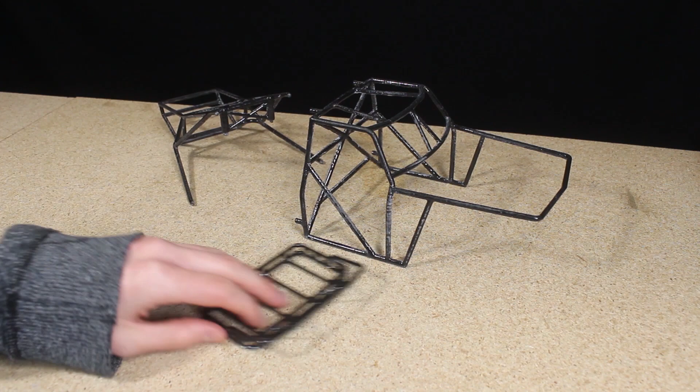I started off by doing some sanding on the cage and roof rack pieces in preparation for painting. I usually like to sand the entire surface of a part prior to painting when using a resin coating like I did here. I will still use the file in a few spots where the resin was a bit thick, like in some of the corners.

I got several questions on the last video regarding why I chose to use a resin coating as opposed to using acetone to smooth the surface of these parts. I chose a resin coating because I wanted to print these parts in PLA rather than a material such as ABS, which can easily be smoothed with acetone vapor. I don't do a whole lot of printing in ABS, so none of my printers are really set up for it, and when I do print something in ABS, it's usually just a relatively small, simple part.

But for a large print like these cage pieces, which require a lot of time and material to produce, I prefer to use PLA since it's much easier for me to print, and it's far less likely I'll encounter any warping or other issues while printing.

Also, as a positive side effect of using a resin coating, it helps strengthen and stiffen the cage. But if I had the means of reliably printing these cage pieces in ABS plastic, I would definitely consider doing so and choosing a method such as acetone vapor smoothing to achieve a nice surface finish, since that would cut down the amount of time spent sanding. I will be showing some other processes for smoothing 3D printed parts, including using acetone, in future videos.

Right after sanding, I sprayed a few light coats of primer. I ended up running out of the primer I was using for the cab piece, so I used a different brand for the rear section. That's why they're two different colors.

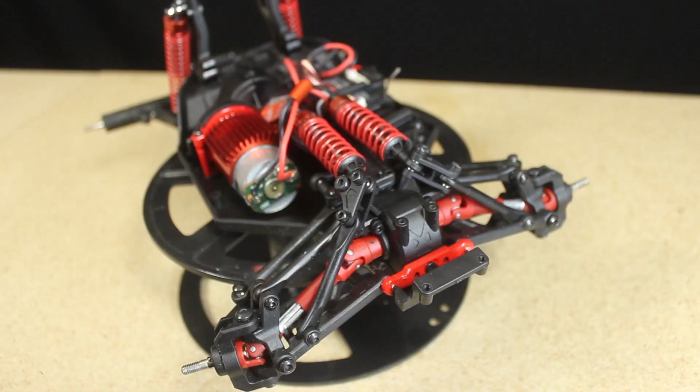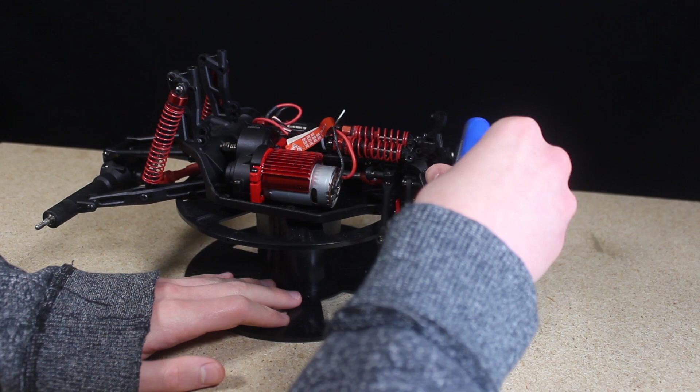I've been brainstorming some ideas about where I want to place the battery. I decided to mount it on the very front. To secure it, I designed and printed a custom battery mount.

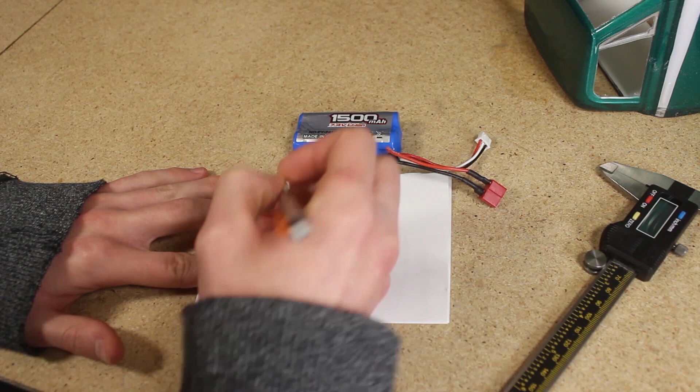For a while now, I've received a lot of comments from people who want me to show more of the design process for creating parts, and from those who want to learn how to design and print their own custom parts for their RC vehicles. I thought this battery mount would be a great part to demonstrate the design process I used to create it, and to demonstrate just how easy it is to create simple custom parts for your vehicle with just basic CAD knowledge. This is by no means meant to be a step-by-step follow-along tutorial, just a general overview of how I went about designing this part.

Hopefully this will help those of you who want to create your own custom parts get some ideas and inspiration. I started by measuring the dimensions of the battery pack so I would know how big I needed to make the mount.

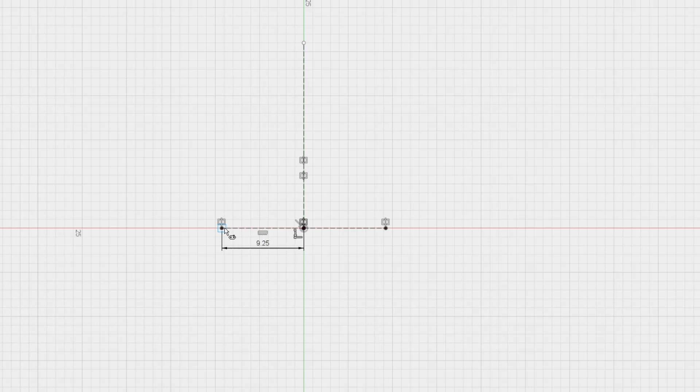With those dimensions, I began making a simple sketch using CAD software. To design this part, I decided to use Autodesk Fusion 360, but a simple part like this could be easily made using just about any 3D modeling software.

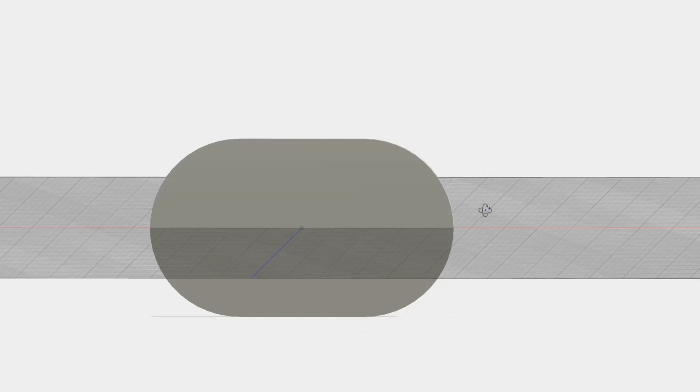When designing this part, I made sure there would be plenty of room for the battery, so I oversized the interior cavity by 2 or 3 millimeters to ensure the battery wouldn't fit too tight. I wanted to lean on the side of having the battery holder be a bit larger than needed. If the battery ends up being a loose fit and I need to use foam padding on the inside, it's not a big deal. But if I lean towards making this holder as tight and snug as possible, I risk making it too small and having to reprint the part.

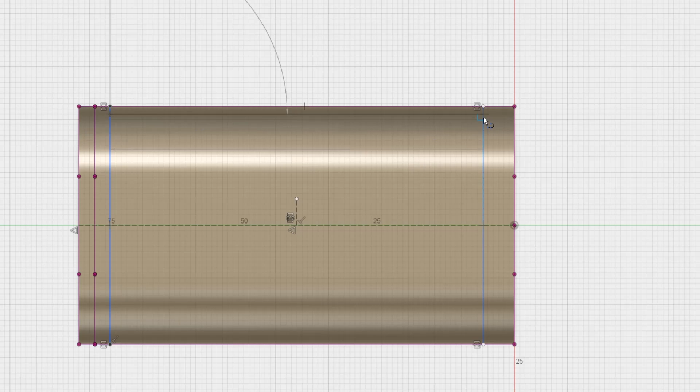I can be a lot more relaxed about dimensions and tolerances when I'm making sure there's plenty of room. While modeling the part, I thought it would be cool to make the front of the mount look a bit like a radiator, so I incorporated that into the design.

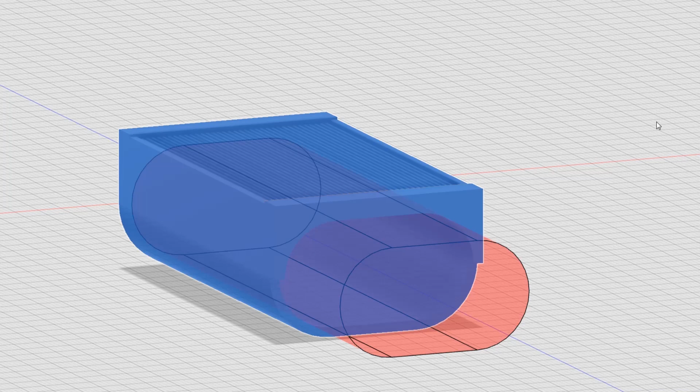One thing I think is very important when doing any design work, especially as a beginner, is to always start with a basic sketch before modeling, whether with pencil and paper or sketching software. I like to get my ideas out on paper and come up with a plan of how I want the part to look and what functionality it needs before modeling in CAD.

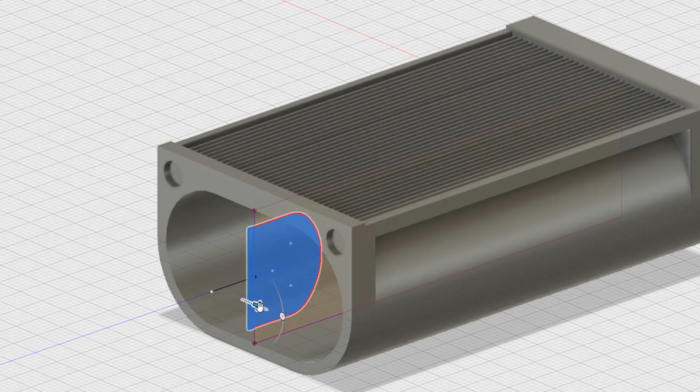I'll often be able to identify potential issues or areas for improvement just from a rough sketch. But since this part is very simple and I had a pretty clear idea of how I wanted it to look, I didn't end up sketching anything out, I just dove straight into the design.

I'm very pleased with how this part turned out. The only thing I forgot to do was add 1 or 2 additional magnets to the opposite side of the cover, but as you'll see, I end up using a bit of tape to act as a hinge, so it's not an issue.

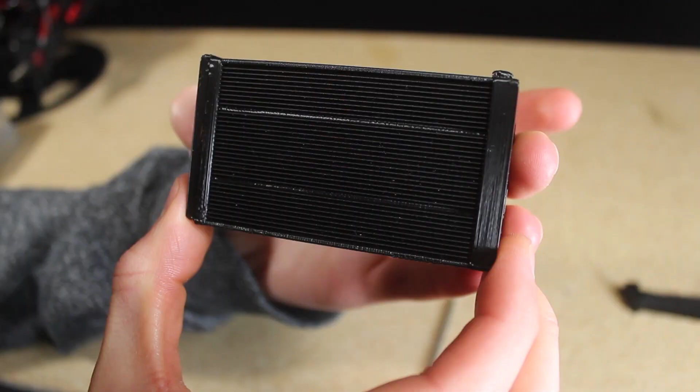The slicing software ended up removing 2 of the fins on the radiator, which I didn't notice until after the part was printed, but I think it still looks fine. In total, I spent less than 10 minutes designing the part, and it took about an hour to print, and I'm very pleased with the finished result.

I wanted to demonstrate just how easy it is to make a custom part like this with just basic CAD knowledge and a standard FDM 3D printer. With those 2 things, you can create all kinds of useful parts for your builds.

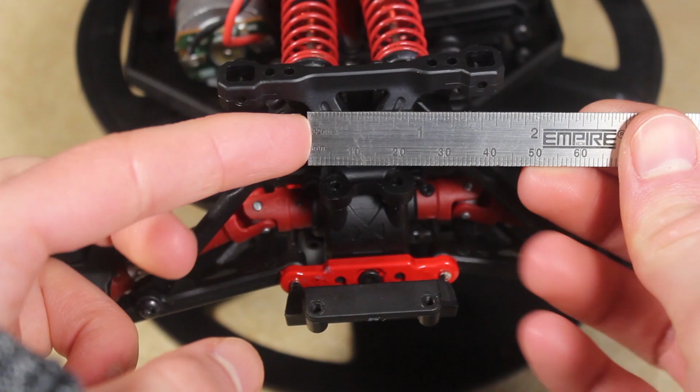I'm also going to be making a mount for this, which will screw onto the front of the chassis, which you'll see in a minute. I wanted the battery holder and the piece that secures it to the chassis to be 2 separate pieces, because it's a lot easier to secure the mount to the chassis and then glue the battery holder to the mount, rather than making it one piece and worrying about the precise position of the mount.

Again, the chassis mount is a very simple design. I decided to add a loop to the top in case I wanted to use it as a tie down for the wires.

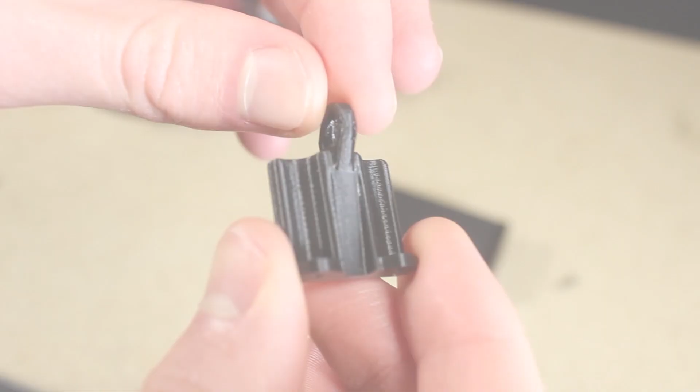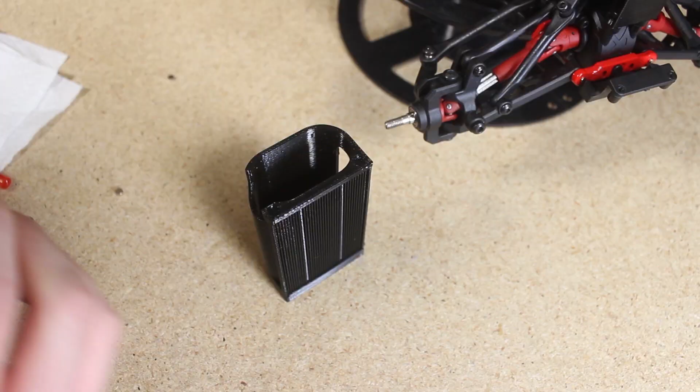I went ahead and screwed the mount to the front of the chassis. Before gluing the battery holder to the mount, I first used a bit of super glue to secure the magnets for the side door.

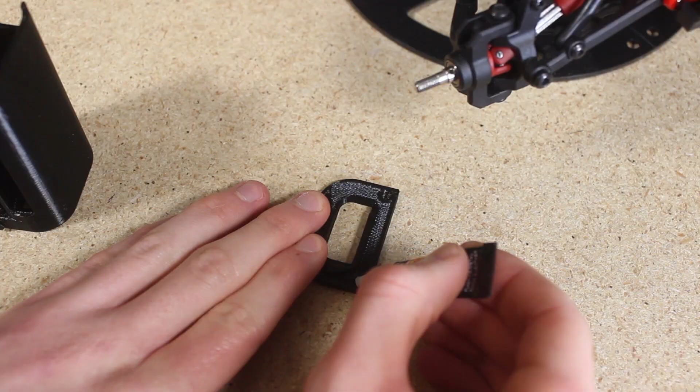As I mentioned earlier, I should have put a few magnets on the other side of the battery door, but I just used a small piece of tape to secure it. To secure the battery holder to the mount, I used shoe glue as an adhesive.

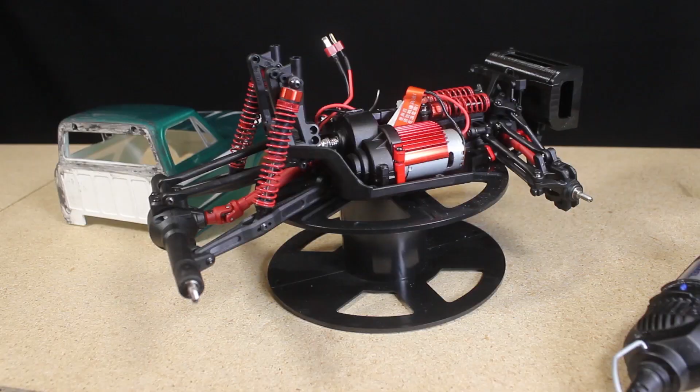I wanted to work on the position of the body. I needed to remove some material from the back side of the cab so the body would sit lower on the chassis. I marked the position of the slipper clutch shaft and used a rotary tool to remove material. PLA isn't the nicest thing to sand since it tends to get soft and melt while sanding at high speeds, but the sanding drum cuts through it like butter.

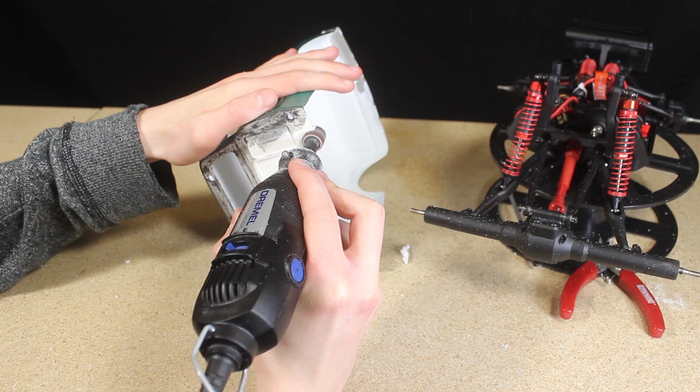I checked to see how well it fits with the cage in place. I did need to remove a section around the slipper clutch shaft, but I'm going to try to avoid removing any material from any other sections of the cage that runs along the back side of the cab.

I noticed that the rear cage section was sitting a bit too high, so I needed to sand down the posts that sit on the chassis. At first I used a file to sand around the raised center section, but doing this was a bit tedious, so I just cut off the ends and used a rotary tool to sand down that section of the cage until it's at the height that I want. I'll add new guideposts to replace the ends that I cut off later on.

After a bit of sanding, I got the rear section of the cage to sit at the height that I think looks good.

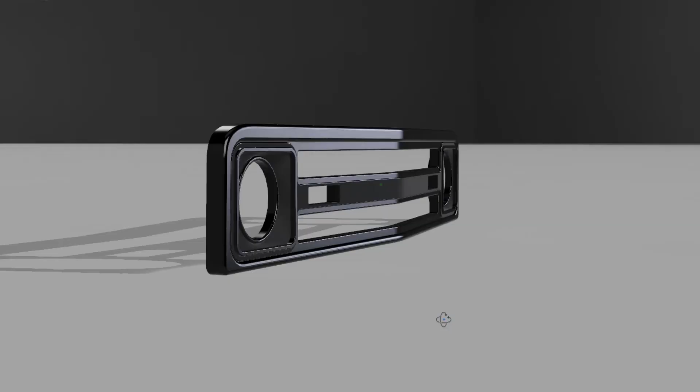I'm not a huge fan of the grille that's on this truck right now. It's a nice design on the full-scale trucks, but since this one's molded polycarbonate, it doesn't have a very realistic appearance. I decided to design and print my own grille.

The one I designed is more reminiscent of the grilles used on 1967 to 1970 Chevy trucks. I printed the grille you see here using an FDM 3D printer and PLA plastic to act as a prototype and to test the fitment. I will probably be reprinting this using an SLA printer once I verify that the grille looks and fits how I want it. I cut the bumper and grille away from the rest of the body.

Although it's probably obvious, I won't be using this bumper either. I will be making my own custom designed one. After cutting it away, I wanted to get an idea of how much material I needed to sand away with the sanding drum in order to get the grille to fit properly.

It looks like I did a good job of designing the grille. It fits perfectly, and I think it looks much better than the old one.

As you may recall, I cut out the windows since I will be painting this body, and I figured it would be easier to remove the windows and install new ones instead of tediously masking them. Doing so left a rough edge around the perimeter, which I wanted to sand smooth.

I started by using some sandpaper in a few spots, as well as a rotary tool with a small grinding bit, which works well in rounded corners such as the lower corners of the windshield. I used a hobby knife in a few areas like the front vent windows where the space is too small to sand.

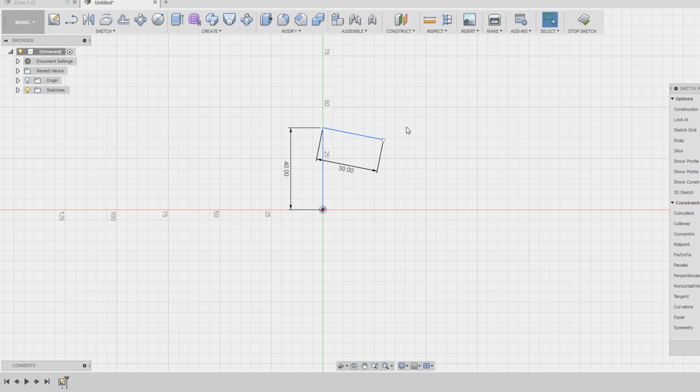I then began modeling a piece that will be glued to the underside of the hood. This piece will form the sides of the vents and give the section that will be cut and folded down a place to be mounted to, as you'll see later on.

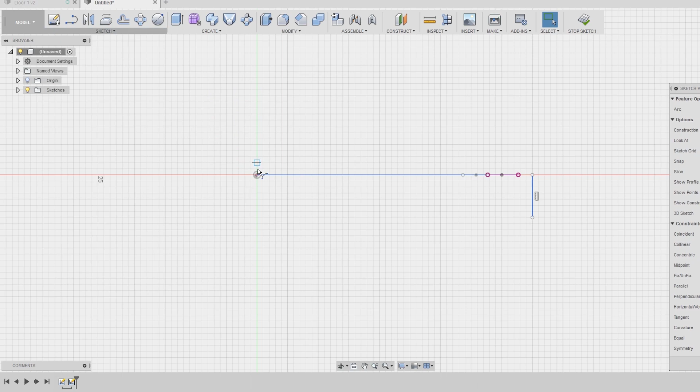Designing this part was very simple. I just made two sketches that you see here, and I then extruded each sketch and used a Boolean intersect command to create the body.

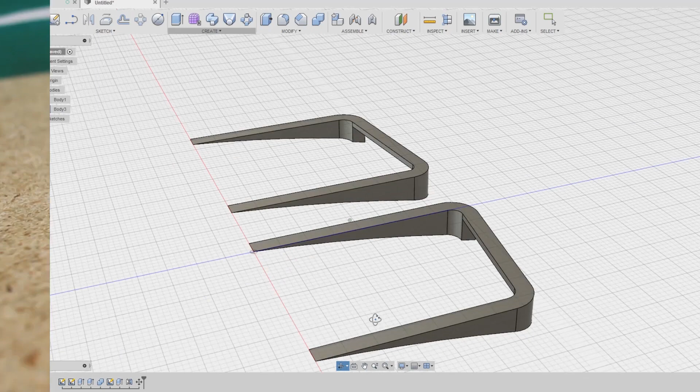I then created an additional sketch to cut a section into the front. I mirrored the design, printed out both pieces, and positioned them where I wanted on the underside of the body. I then marked the position.

I used a hot knife to cut through the body. Since this body is made from relatively thick polycarbonate, it doesn't cut through it as easy as it does through some thinner materials, so the cut ended up not being very clean. Because of this, I needed to do some additional trimming and sanding around the vent openings to make them as smooth as possible.

After doing this, the cuts for the vents were looking much better. Next, I glued each of the vent pieces to the underside of the hood, making sure that they are lined up correctly and are as symmetrical as possible.

Moving on to the cage, I spent some time brainstorming how I wanted to mount the cage to the chassis. I started by making the rear section be able to be secured to the factory body post holes on the back. To do this, I started by drilling some pilot holes, followed by 3mm holes for metal rods to be inserted into.

I marked the length that I wanted the rods, cut them to the correct size, and glued them to the cage.

This will aid in positioning the rear half of the cage. I plan on securing the cage and body using magnets, which I will be showing in a future video.

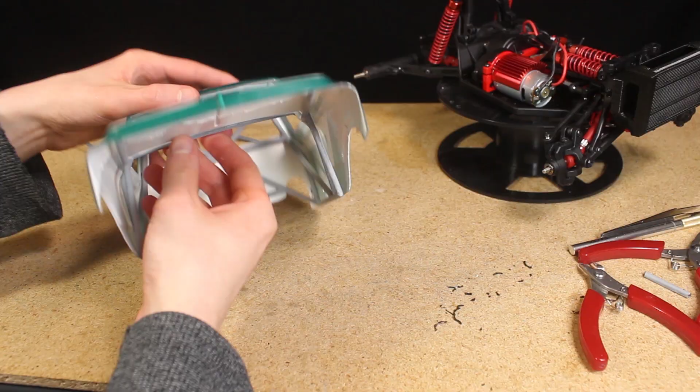I moved on to painting both cage pieces, first masking off the rods. I started by applying one final thick coat of primer, followed by several thick coats of paint.

For a part like this that has been FDM 3D printed, I find that laying on the paint really thick helps to smooth out the surface and make the individual layers less visible. Using thicker paint like this Rust-Oleum satin black I'm using seems to help as well.

Here's a look at the finished painted cage. I'm very pleased with the finished result. Taking the time to apply a resin coating and many coats of primer and paint has paid off.

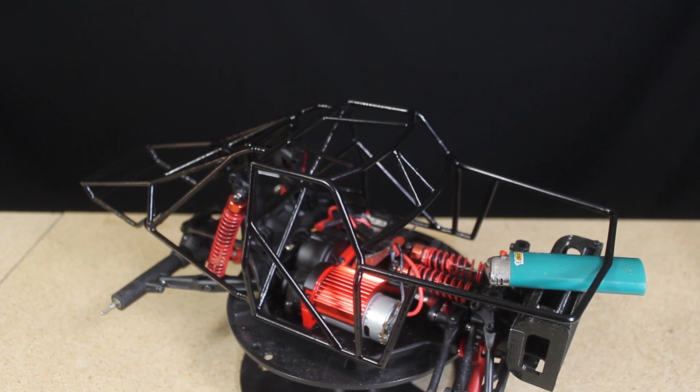While waiting for some of the parts on the Firebird to be printed, I did a little bit of work on a roof rack that I designed and printed a while back, which I'll be using on the K10 Prerunner build. Both the roof rack and the resin coating I applied to it are a bit rough, but it's nothing a little bit of sanding and filing can't take care of. Plus, I'm not worried about trying to make this roof rack look perfect.

I started by filing away any of the larger imperfections, especially those visible from the top, which will be the most visible. I then used some sandpaper to reach the tighter areas, and to help give the overall surface a smoother finish and prep it for primer. I also made sure all of the lights would fit onto the front.

After I finished sanding, I wiped away all of the dust and began layering on some primer, which will help to smooth the surface.

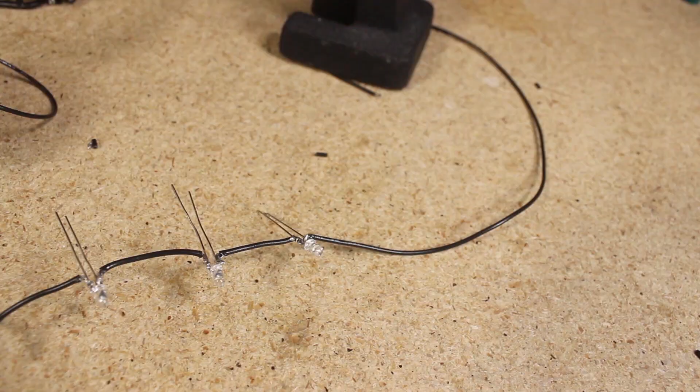After they were all wired, I did a quick test to make sure they were all illuminating. After confirming that they all worked, I applied a little bit of heat shrink to cover the solder and cut away the excess leads.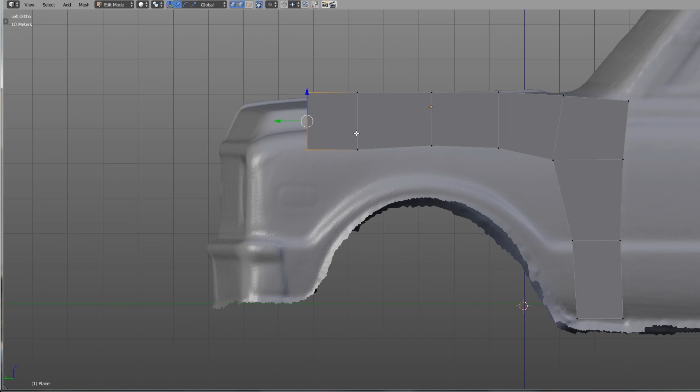Another item that's going to make a great addition to the truck is some custom front Prerunner style fenders. I scanned the body a while back, and I'm using that scan to aid in the design of this piece, which I'm modeling in Blender.

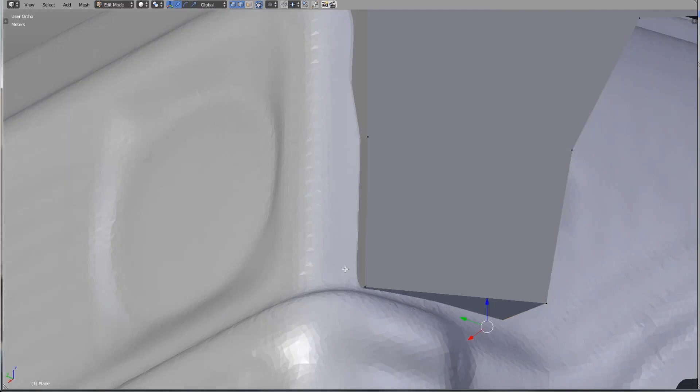I found that coming up with a design that I liked was a bit difficult since these fenders have to accommodate the larger than scale tires, so therefore the wheel openings have to be very large. I also couldn't find a whole lot of relevant reference images of huge fenders on this body style of truck. Despite this though, after a bit of messing around with the design, I ended up with a result that I was satisfied with.